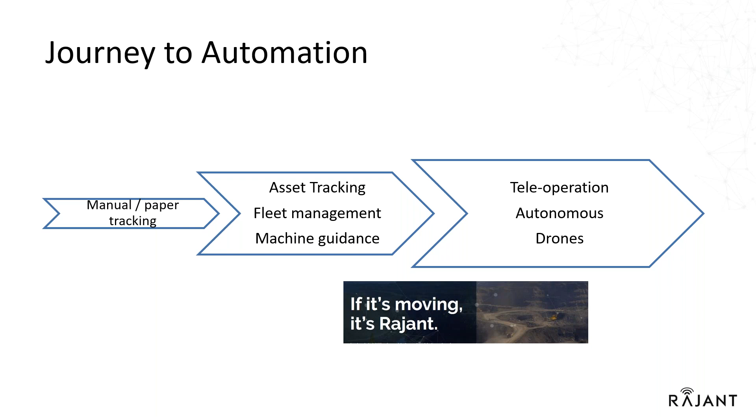As most of you know, there are some new names and partners in this webinar, but most of you know Rajant is focused on mobility. And now the evolution of mining to automation has turned into teleoperation, autonomous use of drones, etc. Each step, each change has meant a need for more and more stable, high bandwidth wireless foundation. When it works, nobody knows about it, but when it doesn't work, then everybody talks all the way through the application.

So just a minute overview about Rajant. We have customers and partners pretty much everywhere there is mining around the world. For those of you who may not know really the reason why Rajant has been successful, I usually just talk about 4 key points. We have no central controller. We use multiple frequencies, which allow multiple levels of redundancies, so your network does not go down, and your applications where you have invested millions of dollars also does not go down.

So let's go back to the focus of this webinar, automation projects. Last year, of course, not much has happened this year because of what happened, but last year and before that, we had a coal mine in the USA use Rajant for teleoperation. We had a copper mine in Chile, and this is where Samuel comes in. There are 3 very unique, interesting projects that he has been part of, delivering teleoperation autonomous solutions to the mining industry.

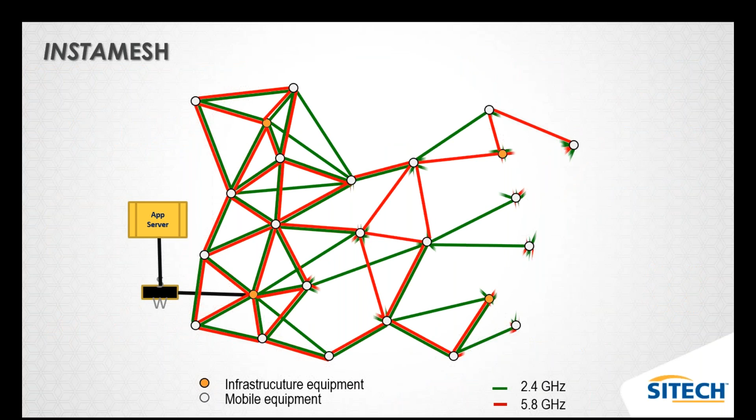What really allowed those numbers to happen during this time? The answer is that the results of operations using Rajant were greatly increased, and there are some characteristics of Rajant that allow that to happen.

First, Rajant enables the true power of a real full mesh network, where every piece of equipment communicates with each other simultaneously on multiple frequencies. This creates a big net of communication with paths on different frequencies, creating redundancy of frequencies and of equipment, resulting in a much more reliable network for mining operations.

Another detail that allowed Rajant to prove its value inside mining operations is the capacity to automatically adapt to dynamic operations. As we already know, mining demands dynamism, and its network needs to be available during movements, never breaking for handoffs.

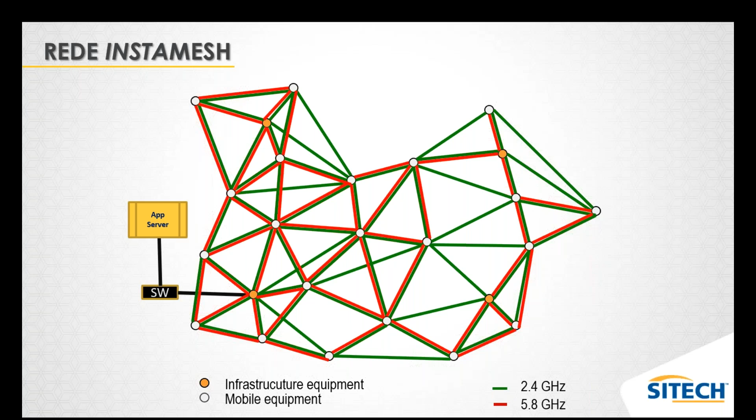So what happens if equipment moves? As the equipment starts to move, it won't lose the many links it has to communicate. Before it loses the old links, it creates new ones, and they get closer to other radios. This is why Rajant uses the slogan 'make, never break' - it is moving, but it's creating new links, so the radio and the equipment will always have links to communicate.

The effect of this ability to adapt to movement is an extremely reliable network, exactly what miners need for their operations - never worry about networks and communications.

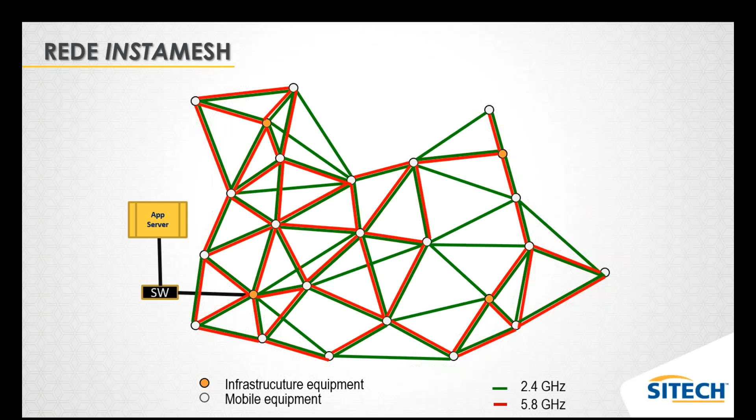Considering the specifics and details of Rajant networks we spoke about before, how is it going to work in a real operation? Every piece of equipment that has a Rajant radio installed will talk to the next machine or physical structure - excavators communicating to wheel loaders, then to drones, pickups, trucks. Everything will talk and create a huge network of multiple purposes: telemetry, dispatch, fatigue monitoring, high precision, video surveillance, VoIP, and of course automation, everything in the same network.

Inside the Brazilian market, we're using some models of the Rajant portfolio: the single band radios, the JRs, the dual band radios, the ME4s and the KM3s, working on 2.4 and 5.8 gigahertz. We also use a lot the 4-band radios from the LX family, which can also include 900 megahertz. We use these models according to previous network planning and what the customer needs to communicate over the network.

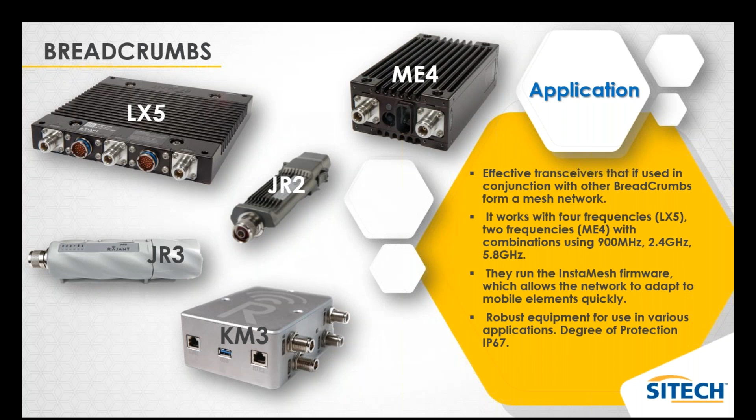Moving on to real examples of operations using Rajant networks. The first operation we deployed in Brazil was the ore stackers and reclaimers operation. These machines needed constant communication, and each time the network had an issue, the whole operation stopped. The time to restart everything was considered a production loss, and since these huge machines moved many tons per hour, every minute was precious.

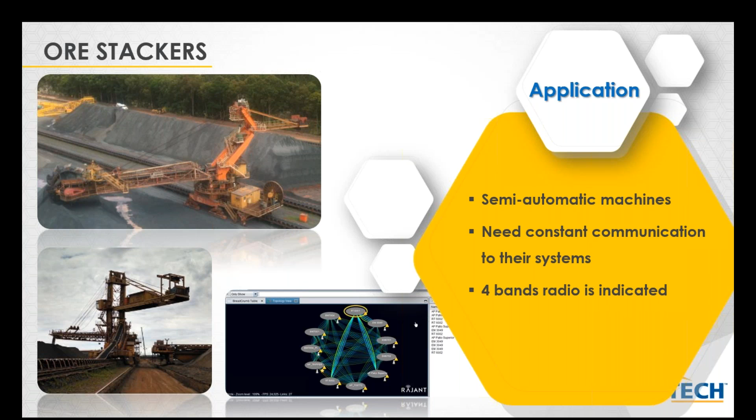So we considered using the 4-band radios to bring equipment and frequency redundancy. To confirm the increase in performance and what we could save in production losses by delivering a reliable network such as Rajant, we proposed a proof of concept.

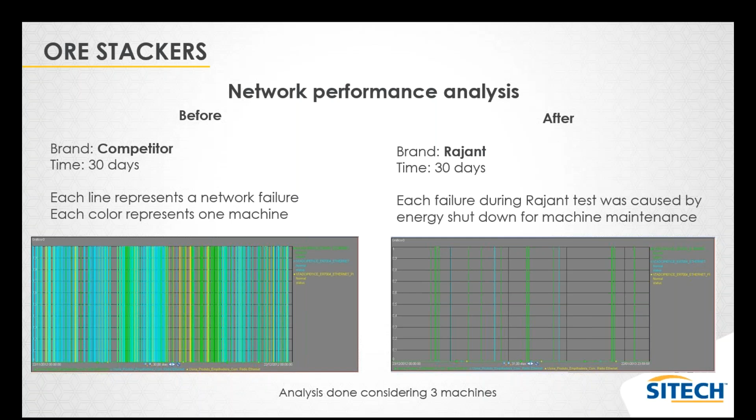That proof of concept allowed the customer to present the solution inside its corporation and defend that it brought a level of 99.9% availability. The result was so impressive that they started inviting Rajant to new and more exciting challenges.

So we're helping these mining companies properly put many autonomous projects to work: autonomous drills, autonomous dozers, and different types of remote cabins. Rajant brought the desired level of latency and throughput for cameras, all the technical requirements for these solutions to work properly. We'll talk more about these types of projects in this presentation.

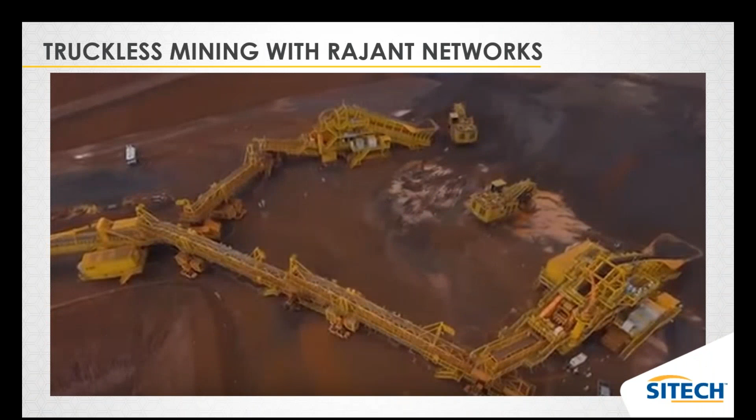Another very specific type of operation, but with the same level of importance and linked to the need for a reliable network: we recently deployed the Rajant solution in truckless mining. Similar to the stackers and reclaimers operation, in this process each part of the system needed to communicate with each other to allow the process to happen. If a network failure happened, the whole process would stop.

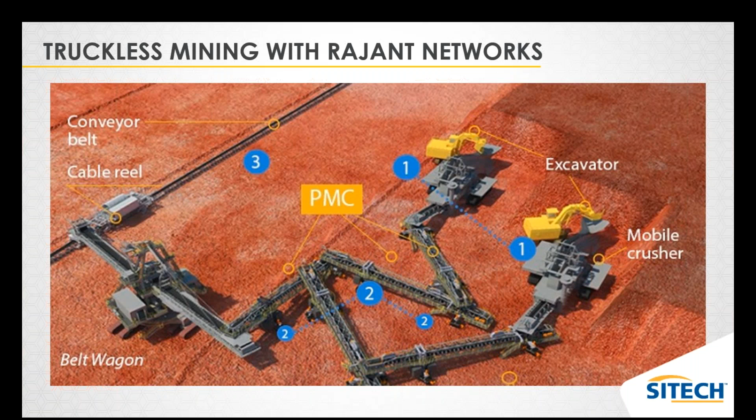After we passed the POC protocol challenges and deployed the Rajant solution, we allowed this customer to move from a scenario of many $1 million losses to not only zero losses, but also increased production capacity.

The most recent automation project operating over Rajant networks was created after Brazil's recent episodes involving mining dams. We were challenged to design a way for companies to remove material from mining dams without the presence of humans in dangerous areas, which include not only the dam itself but the areas where material could be projected if a collapse happened.

Including all the technologies inside SITECH Brasil's portfolio, we created a remotely controlled system for dam decommissioning operations, where it would be possible to operate heavy machinery from a safe distance with presence and productivity.

Why were we able to deliver this type of project? Mainly because we had been working for the last year on a request to apply remote control on an amphibious excavator that worked inside mine dams, moving material. There was a risk that this machine could fall, so it was needed as this operation was unmanned.

The operator would be outside the machine, operating from a safe distance or from an office, seeing the operation through cameras on a monitor or a tablet. As we were already advanced on this solution, we were able to support remote control for dams.

So how would the project work?

Considering the dam decommissioning project, we would need to place not only one machine inside the risk area, but many machines of different types: trucks, wheel loaders, excavators, dozers. All these machines would be remotely controlled from a control shelter deployed in a safe area, indicated in the illustration as the blue zone. The red zone would be risky to place anything, mostly humans, close to it. In this way, operating from a safe area, we wouldn't need any human interaction in the risk area.

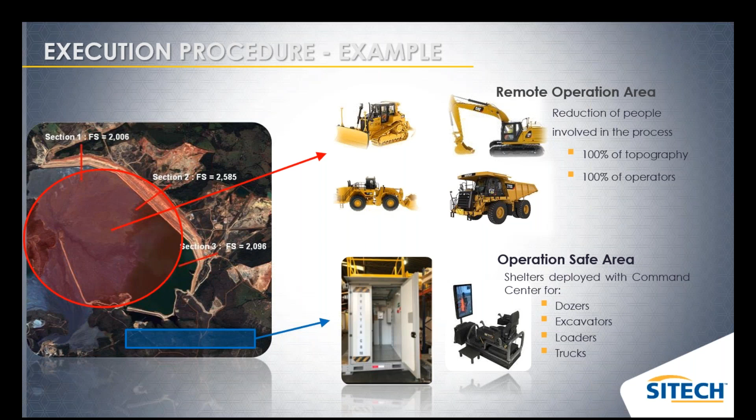So, what is the general structure of the project? Basically, we will need to place cameras on strategic positions of each machine, and high precision systems on the machine to allow it to operate according to a design project with blade automation. We will need to place Rajant radios to allow everything to be transmitted in real time to monitors inside the control shelters. After all, we would use drones to collect images of the operation, upload them into a platform, analyze and deliver updated data, update the 3D project, and finally send it back to the machines using the high-performance network.

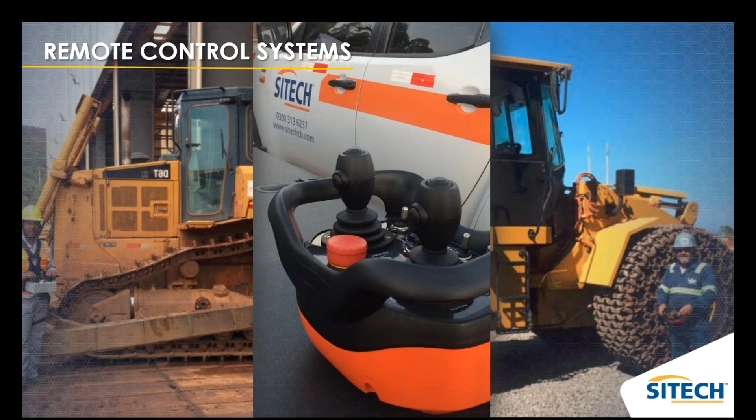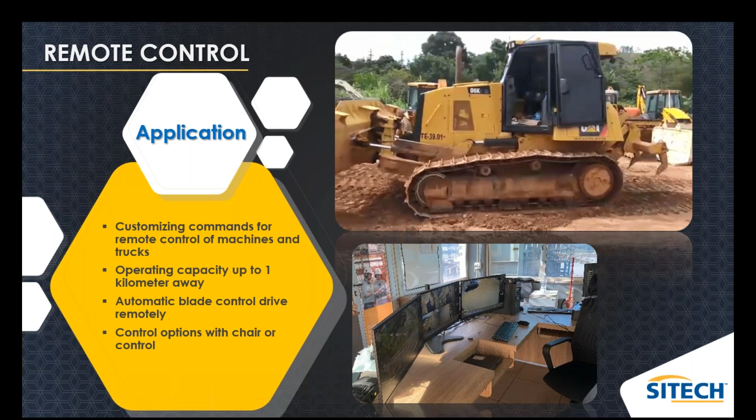The first technology we deployed for the solution, almost the heart of the solution, is a remote control. Why did we choose the Novaer remote control? We chose it for the same reasons we chose to represent the Novaer brand: they could customize the remote control for any machine necessary. We could also operate machines up to 1 kilometer away, and include automatic blade control with the high precision systems. We could operate the machines from a joystick or a workstation inside a control shelter.

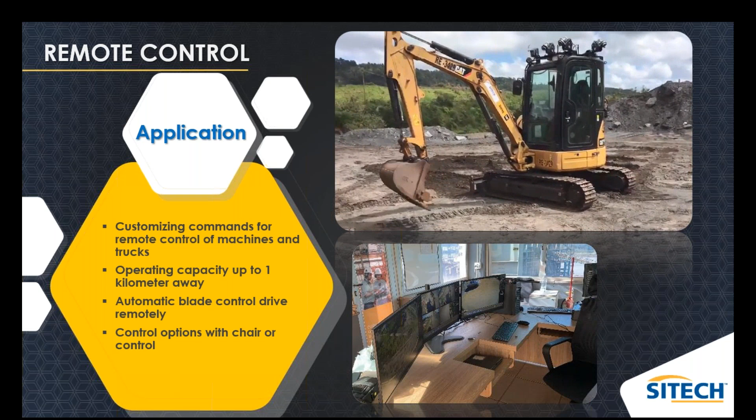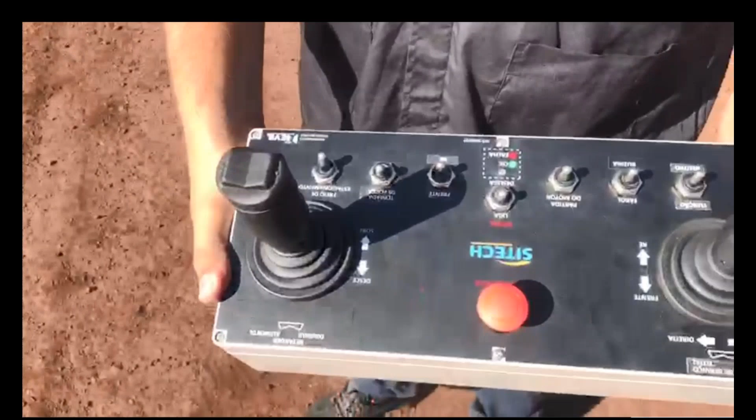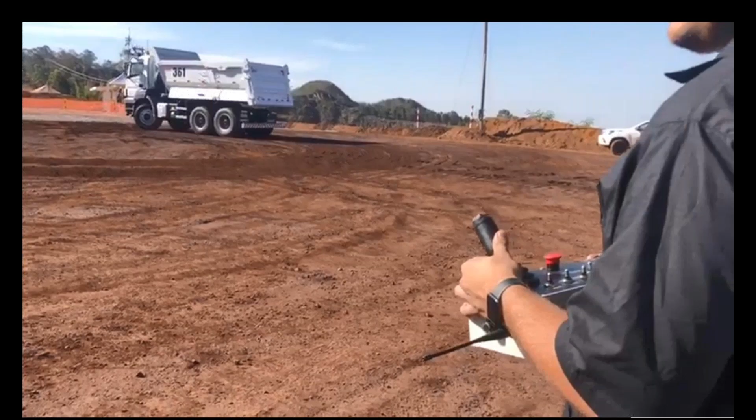As you can see, we have many examples of machines already working with the system in the Brazilian mining market. One important achievement for us was developing a remote control for trucks. We couldn't find a ready solution on the market, and trucks were a big part of this project. This was only possible because SITECH has the adaptability and capacity to customize its technology to different types of machines. As you can see, the truck has all the cameras positioned strategically on its sides, and the Rajant network devices mounted over its cabin.

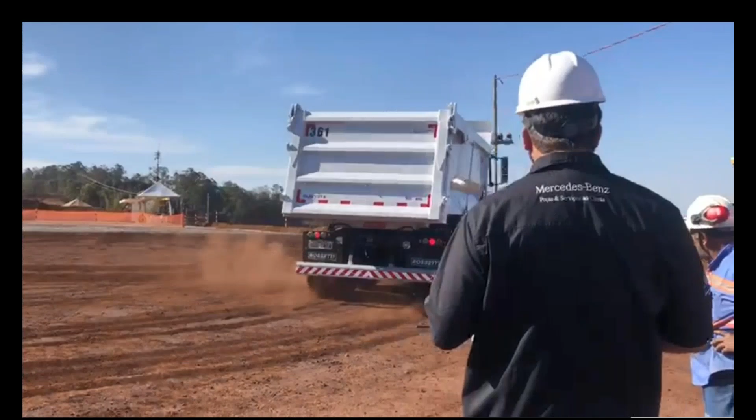So, once we had the technology to remotely operate all the machines, we needed to move forward to the infrastructure. We knew we needed something we could place in the safe areas, so we needed to develop a control shelter.

In this next step, we needed to provide the proper infrastructure, not only to allow operators to be inside a safe and ergonomic structure, but also to bring all the technological systems needed to allow remote operation: Rajant communication, workstations, monitors, servers, access control for only authorized personnel, air conditioning systems, generators, no-break systems, video monitoring, and so on.

So we designed our infrastructure. We developed that solution with our infrastructure partner, RD Trailers, who are also a Rajant strategic partner. This control shelter was designed to allow up to 4 machines to be operated inside it, with all the technology needed for remote operation.

Our design came to life in the second semester of last year, and the results were great. As you can see, we had everything needed to allow operation from this control shelter: all the telecommunications devices and the workstations inside it.

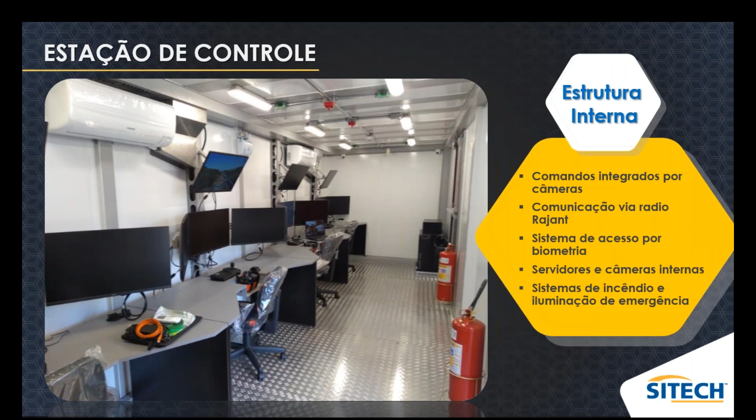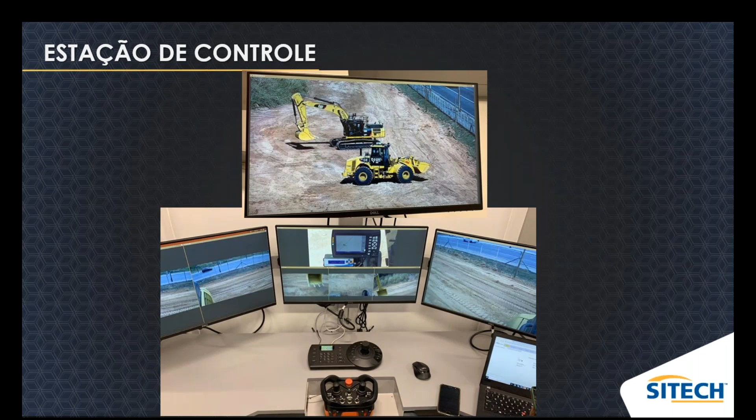On the monitors, the operator could see all the images from the strategic sides of the machine, as well as a view from the top of the shelter to check where the machine he was operating was located, whether it was close to another machine, an obstacle, or an object. All these cameras were configured in HD, high definition.

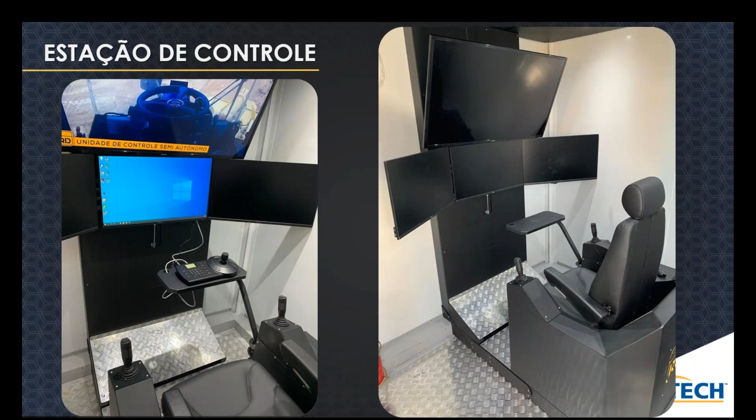The network was the core of the whole project. If the network failed, the whole operation could be compromised, because the operator couldn't have confidence to operate with delay or lack of proper video transmission. We could also improve the solution by bringing devices that made the operator's experience of remotely operating a heavy machine closer to what he would have inside the machine's cabin.

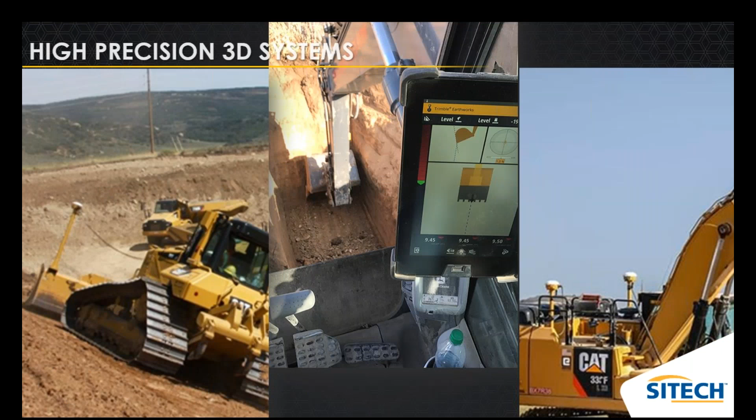So moving forward, the next technology we deployed on this solution is high precision 3D systems. Clearly, safety was the main point of this project, but we also needed to grant productivity and precision to what was being done by the machine. We included Trimble machine control to allow not only high precision guidance systems for operators, but also blade control for the machines. The blades would be automated and move automatically according to the position of the machine inside the operation.

Basically, the technology includes sensors and GPS antennas on the machines that receive positioning information from a satellite constellation, and the correction of this information from a base station. This correction is called RTK, and it's what allows the machine to reach centimeters of precision. This correction may be transmitted through the radio network, and the 3D project can also be sent over the same network. Again, radio was being used as a multi-purpose network.

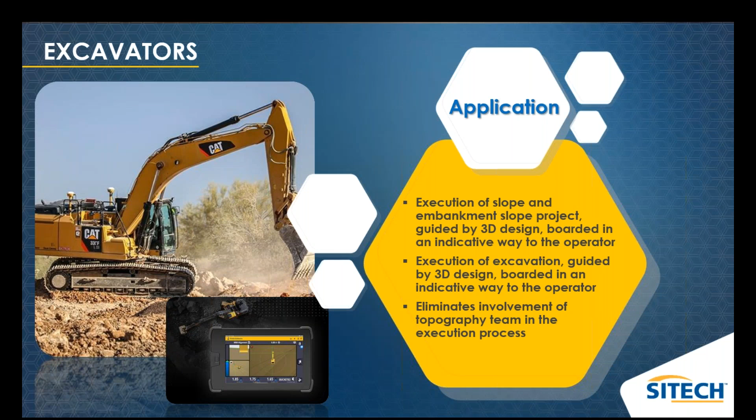So we used excavators to execute embankment and excavation operations guided by the 3D project, mainly to eliminate the topography team needed in the process. We also used dozers for material handling with blade automation, spreading the material in layers evenly, and also eliminating the need for the topography team in the process.

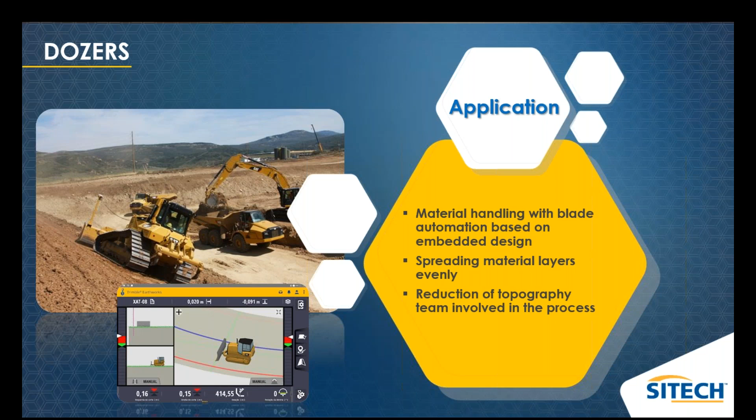Finally, the process would be updated using drones to collect images from the operation. These images can be uploaded to a platform called Trimble Stratus, which can analyze these images and extract many data points and useful information from them, and mainly use the images to generate the 3D project and constantly update the operation project, sending it back to the machine through the radio network in a cyclic process until the end of the decommissioning operation.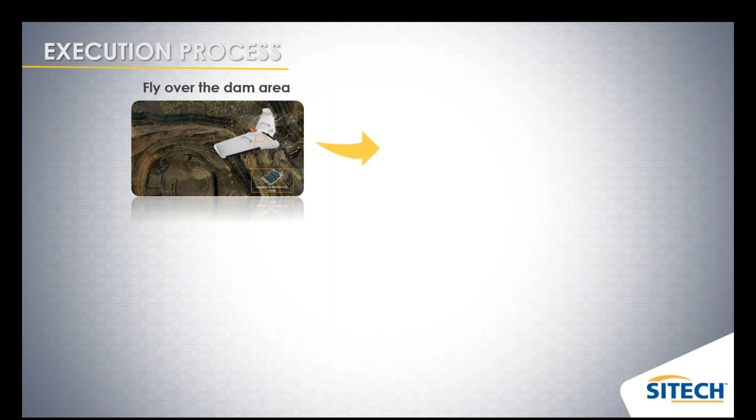So basically, the execution follows a simple but deeply designed process. After the machines and control shelters were assembled and deployed, drones would fly to gather the images, then upload them into Trimble Stratus, process them, and create the 3D projects, then send it back to the machines through the radio network. In this way, we wouldn't need human interaction in the risk area, and we could deliver the first unmanned technology for the decommissioning process.

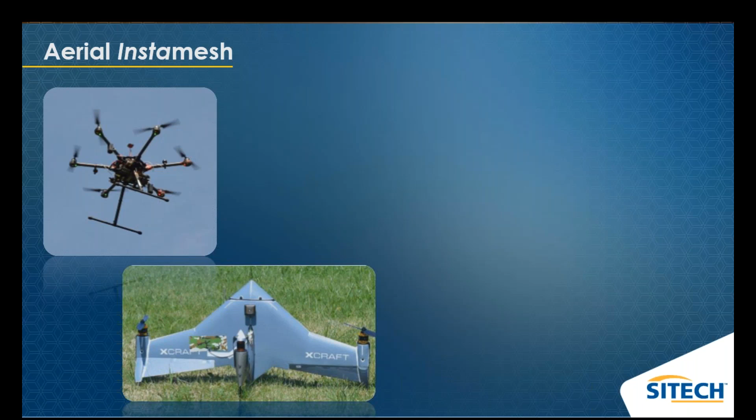Michael asks, is satellite communication often used with Rajant solutions? Not really. So far in mining, we can, and of course there's a need sometimes to connect with a microwave or a point-to-point radio. Satellite has not come up yet in mining to my knowledge. However, in the train and transportation industry, for example in Brazil, there are thousands of kilometers of railroad. We're working on one project where, yes, we will be plugging into a satellite radio at some point, and Rajant will take over at some point. There will be a mix of technology, so it is possible to connect with multiple technologies.

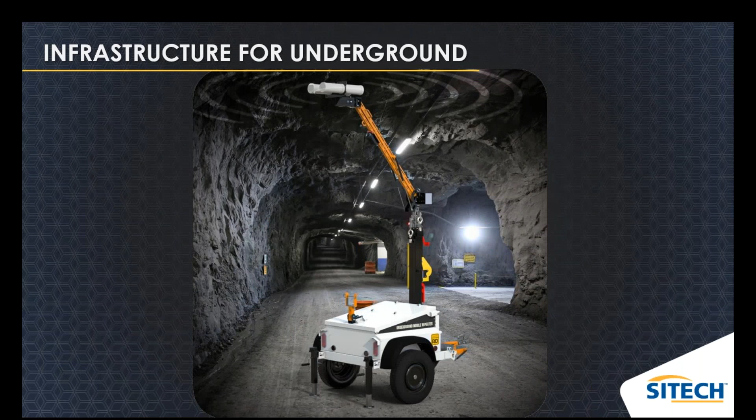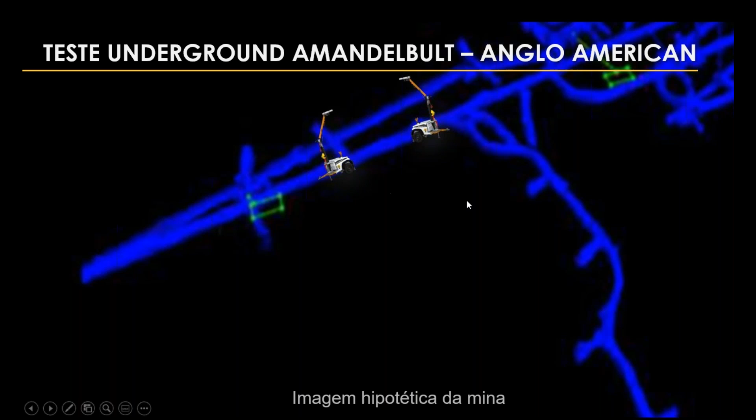Okay, so this regards a proof of concept done with a customer. This case is on the internet, so everybody can see and check what happened. We used dual frequency radios and a set of antennas we designed to reach the level of performance we wanted. We placed the radios in infrastructure models for underground mining and tested the performance. Sorry if I have some information in Portuguese, guys, but I'll explain. We tested the communication performance as we created higher distances between the two infrastructures and the radios, and more than that, when we placed the radios inside the tunnel on a curve.

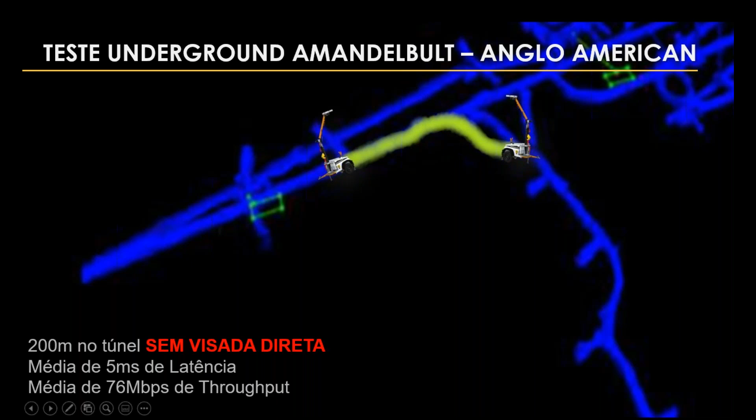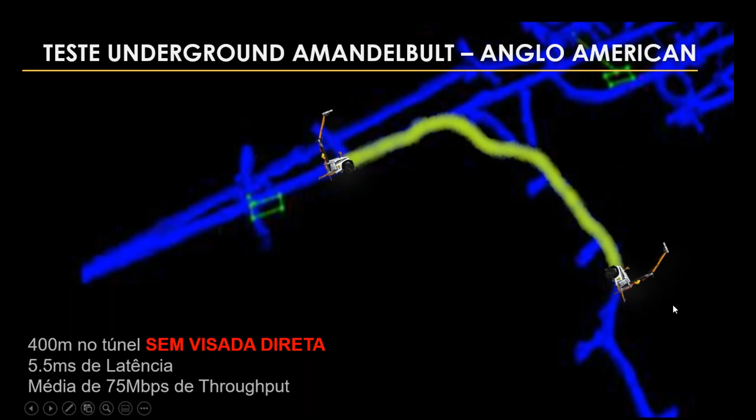First we tested at 100 meters with line of sight: 5 milliseconds of latency and 79 megabits per second of throughput. We placed it inside the tunnel at 200 meters with no line of sight—levels of latency and throughput were almost the same. At 300 meters with no line of sight, more or less the same performance. At 400 meters with no line of sight, same performance. At 500 meters, same performance. And at 600-something meters with no line of sight, 6.4 milliseconds of latency and 68 megabits per second of throughput. So this is more or less the results of the tests.

Of course, this was one test. Each operation has its own challenges, but we are always open to check the customers' challenges and see what we can do to bring a reliable network for them.